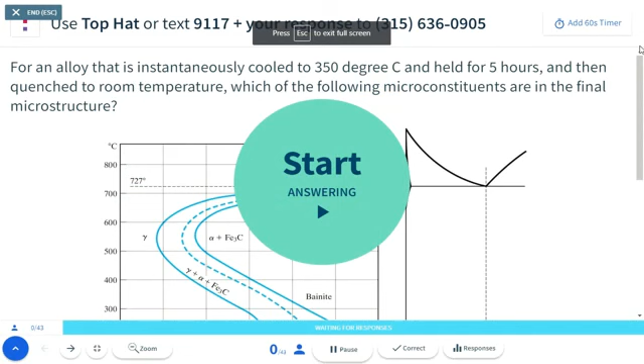Let's review our understanding of TTT diagrams. Here is something you've seen before. It says here an alloy, but when you look at the phase diagram and temperature, you know it's your iron-carbon phase diagram. So it's not just any alloy, it's iron-carbon, and it's instantaneously cooled. That's really important to know.

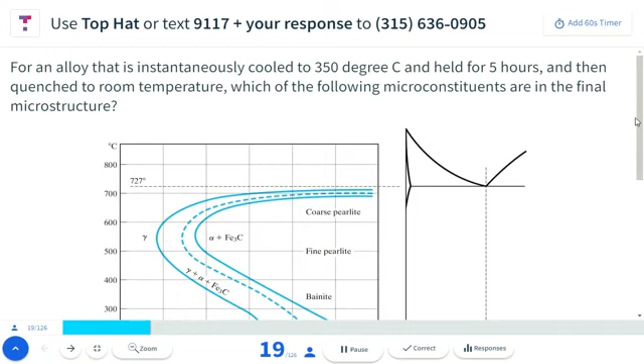We've discussed very briefly, and Professor Phillips during his guest lecture said there are situations where you are continuously cooling, but here it says instantaneously cooled. That means you drop the temperature as fast as you can to 350 C and hold for 5 hours, then quench it to room temperature. So what microconstituents would you expect in the final product?

Here it is, and it would help if you actually saw the time. Here's your transformation temperature, 727. You go down to 350 instantaneously, then hold for 5 hours. So clearly your x-axis is in seconds, not hours, please note that - it's typically reported in seconds or minutes. If you scrolled all the way down, you would have seen it is the phase diagram you all know and love from chapter 9.

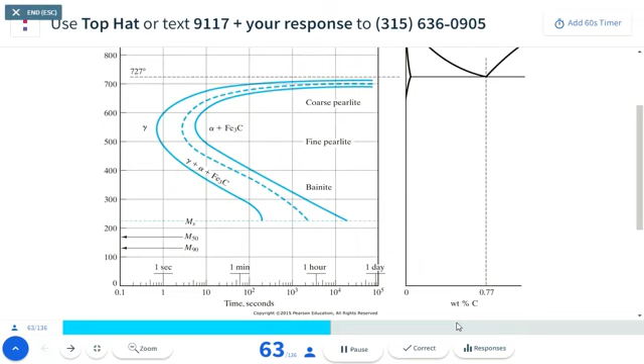So what microconstituent would you have? Would you have coarse pearlite, fine pearlite, bainite, martensite, or austenite?

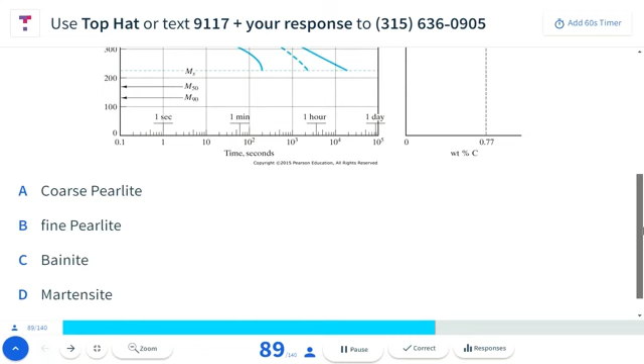Okay, it got transferred correctly. Unfortunately this figure and the options are not all going to fit, so I'm going to scroll back. Some of you would have seen this already in your recitation if you had it on Tuesday, so it should just be a review. You can rule out one answer based on the phase diagram, or if you came in early enough and saw when I exposed the answer.

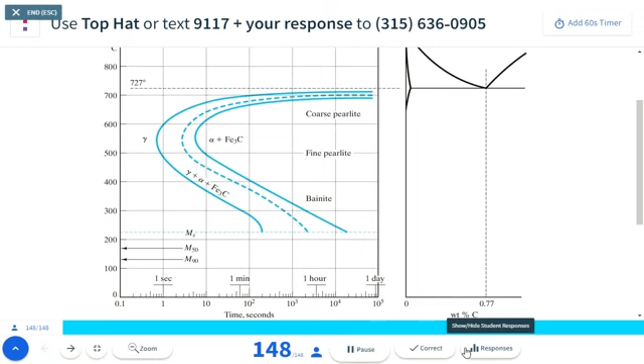Most people have submitted their answers, so I'll await the final five for another five seconds or so. There continues to be more and more of you. All right, we're at 100%, so I think this percentage is going to be high, but let's see.

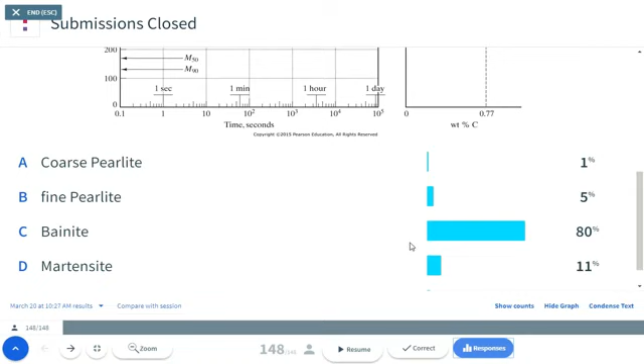An overwhelming majority of you said 80% bainite. That is exactly what you're thinking, which is if you have 0.77 weight percent carbon, this is your phase diagram, your composition does not change - this is the chemistry that you have. Then you drop the temperature very quickly to 350, which is about here.

Because it's instantaneous and isothermal, you can assume you've beat the nose - you haven't gone into this territory yet. If you go all the way down to 350 and wait 5 hours, that gets you to here-ish - 1, 2, 3, 4, 5 - so about here. That means you've gone through 1% transformation, 50% transformation, and now 100% transformation - you're well beyond 100% transformation to bainite. That's how you would be able to read it.

We went through very briefly some examples last time I lectured where you could end up in the middle like this. So if you're at the 50% mark, you've transformed your material from austenite to 50% bainite, and then if you drop the temperature you would get 50% martensite once you drop the temperature here. So just to review, if you have something like this.

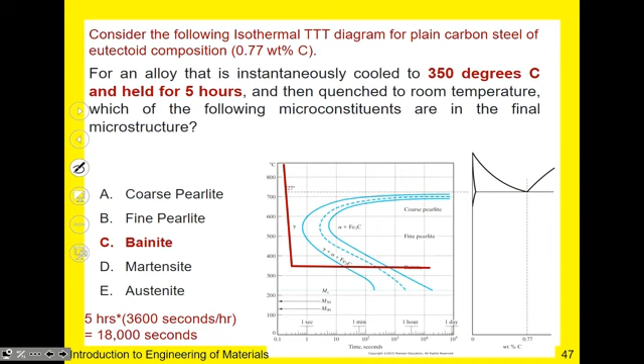Okay, let's move on, mainly because Professor Gaziasetti has talked a lot about strengthening, so I will move on from that, just to reemphasize some points that she made about precipitation.

So if you have a phase diagram like this, and you drop the temperature down slowly from this kappa phase down to this theta and kappa phase, whatever Greek letter you want to use, if you cool it down slowly enough, you allow the growth of the second phase precipitate to form. And that typically forms at the grain boundaries, as we've discussed, because kappa is a solid phase. You're not going from molten anymore if you're starting at this kappa phase. You're starting from a solid phase, and you're transforming from solid kappa now to solid kappa and theta.

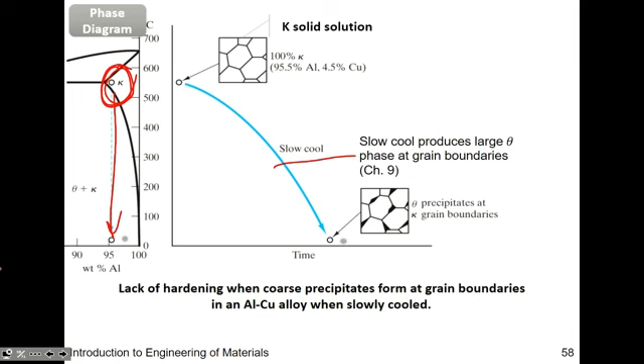Okay, so that's the scenario that Professor Gaziasetti was talking about. Now, there are a lot of heat treatments that you could do to increase ductility in your material or increase the strength a little bit.

So we talked about what happens when you quench very quickly austenite down to room temperature. If you can beat that nose, you're going to get martensite. That's great for you, and the strength will increase, but you lose a lot of ductility. Your material will be much more brittle than what you want in our iron-carbon phase system.

And so what people typically do is they'll drop it down to martensite, and then they gently heat it up again. It's called tempering. You heat it up again, and then you age it so that you can get these fine precipitates that are not actually at the grain boundary anymore. These fine dispersions will get you a little bit of your ductility back, and also some strength as well. So it's always a push and pull in terms of what strength you're optimizing for.

And so one of the questions that came from the front was, okay, I have this intrinsic strength in the material, what can I do with it? You can do a lot with it, and the next chapter, chapter 11, that we'll start today, is just what can you not do with it?

And so there are a lot of companies that have made their money in just knowing how to heat treat a material. A lot of those companies are in Ohio. There's a huge history in Pennsylvania, Michigan, and Indiana of forging and metalworking. So there's a lot of knowledge that already exists, but they're not always so open, because if you're a company and your bread and butter is that you know how to heat treat a material to get a desired property so that you can sell it to a customer, it is not in your best interest to share this secret. So then you don't go into academia, because I'm all about sharing information.

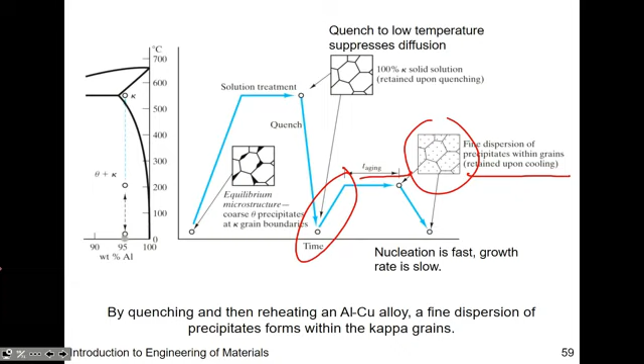There's like fancy animations that Shackelford provided. But anyway, you drop it, then you bring it back up.

So this was the summary slide that she brought up, and I really don't need to belabor the point that if you're wanting to increase the strength of a material, you're going to want to impede dislocation motion. Professor Gaziasetti re-emphasized some of the points we've already discussed in chapter 6, in terms of grain size refinement. So just make your grain smaller, so you have more grain boundaries. And grain boundaries stop dislocation movement, because it's really difficult for this dislocation to keep on climbing, because the energetics there is just too high for it to overcome. Solid solution strengthening, she's also talked about that, and we talked about it in chapter 6.

Strain hardening, right, working a material. And then precipitation strengthening.

So that really rounds out transformation, phase transformation and heat treatment. And all of these tricks that one can do in terms of recovery, recrystallization, grain growth, is just all to manipulate the microstructure so that you get your desired balance of strength versus ductility.

And as you've seen, the chemistries change quite a bit. When we're going from 0.7 weight percent carbon, 0.77, and then you go to 0.78, you're in the eutectoid land. So altering these chemistries, even subtly, have significant implications when it comes to the end result.

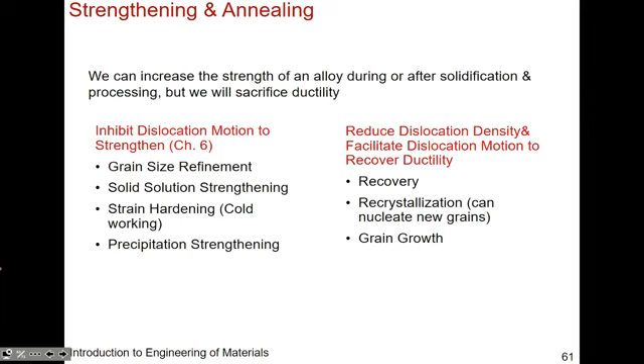So speaking of end results, we're going to skip right to chapter 11, where we're going to start talking about structural materials.

You can think about structural materials as both the type that come probably intuitively to mind, which is metals and metal-based alloys. You can also think about structural materials in terms of ceramics. And maybe that's not so intuitive because of some of the mechanical properties we've talked about, that ceramics can have higher strength, but they are brittle. And so there are certain applications where you don't want this in your life.

But I did pull up an example of a glass that Corning has made, and of course you're all the beneficiaries of the last 20 years of scientific research from Corning. Any guesses, or whoever came in early enough to see me Google this?

I know some of you were here. You saw me type it in. You can just shout it. Okay, wow, very sheepish today, I have to say.

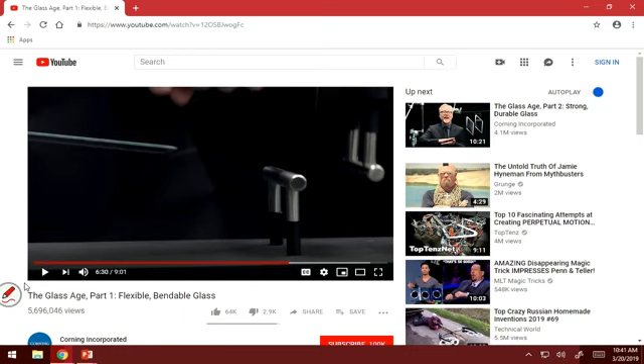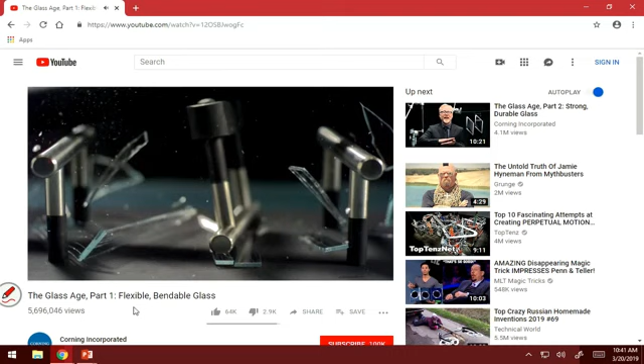Yeah, structural materials. So let's see, this is Mythbusters. We don't really need to, yes, the 3-point test. You've all seen this. So this is what you expect out of a glass if you're going to use it structurally, right? It's going to have this fantastic fracture beyond its fracture point, fracture toughness.

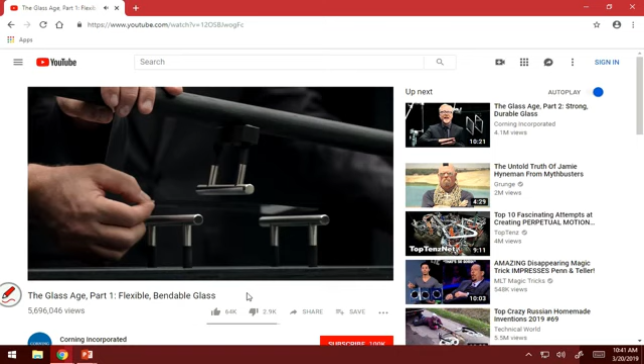And then he holds up this other glass. And notice that they're wearing goggles, safety first. So he's going to try to do the same experiment, but what do you see? You see it bend. I don't know what this is, so I'm going to maximize that. So you can see their discussion of this glass being flexible, and that's not at all intuitive.

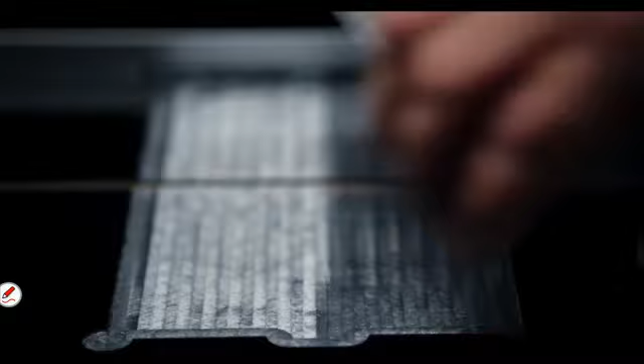And then what they can also do is laminate this glass onto stainless steel, and then do what with it? And then put it in 5 billion phones in the world and sell it to you. This is the result of why when you drop your phone, I will not have a demo on this because I like my phone, but when you drop your phone...

So he's inspecting glass on stainless steel, and they're obviously very intrigued about it, so they're going to do an impact test. They're going to investigate the hardness, although this is not how one typically does a hardness test, but this will suffice for TV. So stainless steel ball bearing, they're going to drop it.

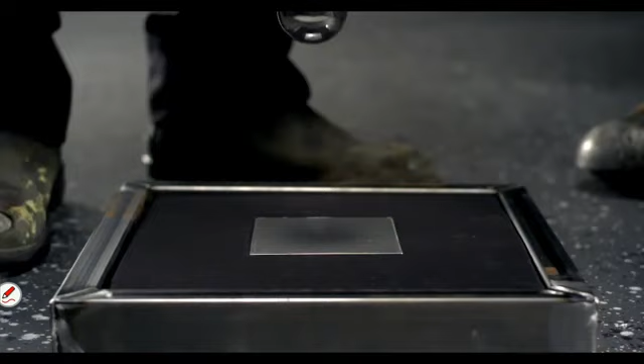Glass, of course, is not going to fracture, as you anticipate. It's going to make a dent. So you see a little bit of a dent here, but it doesn't fracture the same way. And what you'll learn from chapter 11 is exactly why it doesn't fracture. It's all because of a subtle chemistry change. So the glass that you see cheaply made in everyday life has what ion in it other than silicon and oxygen?

For the ceramists in the audience—Ethan is shaking his head, he's not a ceramist. You were going to say silicon. Yeah, glass is silicon dioxide basically, and depending on the crystal structure, it can be ordered or it can be amorphous. It's an alkali, start going down the list. It's sodium, also a good guess. Anytime anybody asks you to guess something, it's going to be silicon or sodium, given the abundance of these elements in the earth.

So that's one way that glass and ceramic materials have absolutely transformed the way we live. Without this, your phones—well, maybe it would be better for Apple, because then your phones would just be cracking left and right, and then they'd sell more phones. So it's hard to say what is economically better for them.

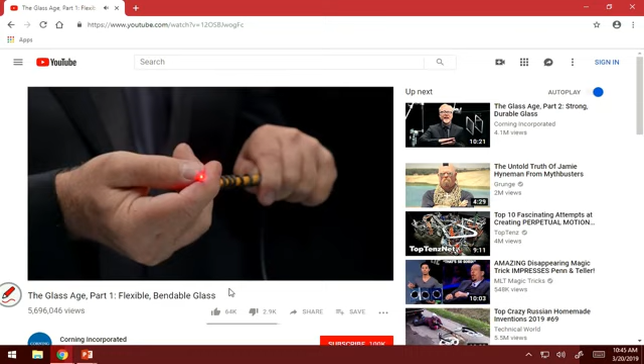Yeah, so he's twisting this, there's light coming out. This is all glass, by the way—well, okay, not all glass. The material outside is not glass, it's a plastic. So he's bending glass, which is not something you would expect. What is that? What is he bending?

All the ECE folks in the audience—fiberglass. Yeah, glass has basically transformed... the only reason Apple even has something to operate on, that everybody taps into the fiber optic network, the fact that you can talk to somebody anywhere in the world, is because of all these fiber optic cables. It would absolutely not be possible if it weren't for the fact that Corning, in the middle of upstate New York, decided they were going to be able to do this. So not only do they do bakeware, which is great—you can bake your brownies, you can bake your cakes—but now you can talk to everybody else in the world because they enabled the internet, as we speak, through glass engineering.

So it seems like, haven't we figured out how to melt down sand to make silicon dioxide glass? No, apparently not, and this is obviously quite recent. So there's a lot of engineering in glass. And of course you have Owens Corning right around the corner in Granville—about 45 minutes from here, if you're not familiar, although I surmise most of you are familiar.

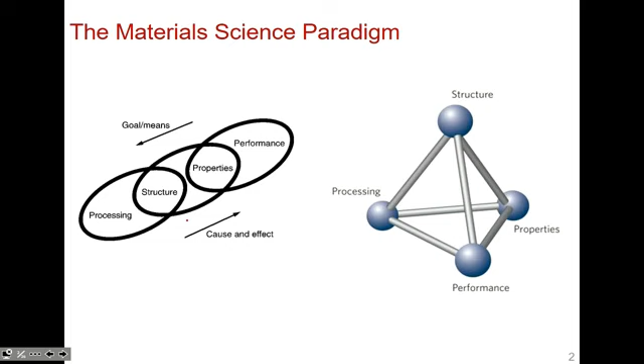So that's what we'll talk about today. This is the classic point, as I said in the first and second lecture of this class: understanding structure is one thing, but then processing it, knowing the heat treatment, knowing the phase diagram—that's the rest of engineering, because it all ties back to the properties and the performance of your material. We're on this loop: we want some endpoint application, we want to know how to process it, and then we need to understand what happens when we process something—what are the structure, property, performance relations of this material. That's a huge buzzword these days: structure, property, performance of a material.

Your chapter 11 goes through excruciating detail into how we talk about materials and how we classify materials. I think it's come up before where you've seen in your homework and exams people refer to all these materials and alloys as, okay, we're dealing with 1040 steel, so that's iron with 0.4 weight percent carbon. All this jargon, all this nomenclature comes out of the taxonomy—this systematic classification of materials, the same way we can classify animals on Earth with their families and kingdoms. We have the same way of talking about materials systematically.

Certainly we've already talked about the different classes of materials—the ceramics, the hybrids, the metal alloys, the polymers—and we'll talk much more about polymers come chapter 12. We have quite a number of guest lecturers who think a lot about polymers and how to make them mimic certain bio functions. It is extremely cool, I think, even though I don't do bio research.

So back to my point about classification, lots to do. When you see something like aluminum 6061, if you work in the aluminum alloy industry, I think you know off the bat what 6061 means. If you're like me and you're not a metallurgist, then you just go look it up. And that's fine, but there's a rhyme and reason for all of these numbers.

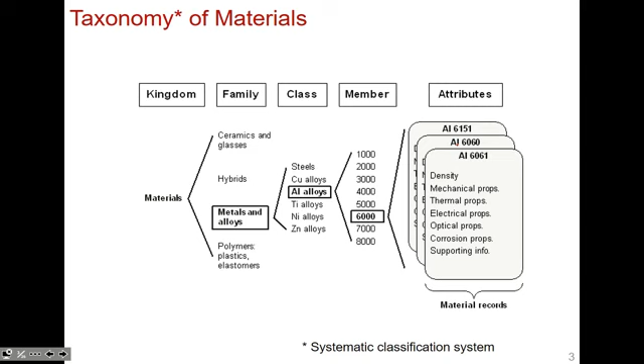Your table 11.1 goes through all of these great details. You have your carbon steels, 10XX, so that's, you could be 1040, it could be 1070. If you heat treat it and have resulfurization, then it's 11XX, and the list goes on and on. So these tables are really just good for reference, not for memorization, unless you happen to work in a lab that deals with one material, then I think you start to know that class of material, that naming system very well. But I would say the takeaway for chapter 11 is that it's a very good reference.

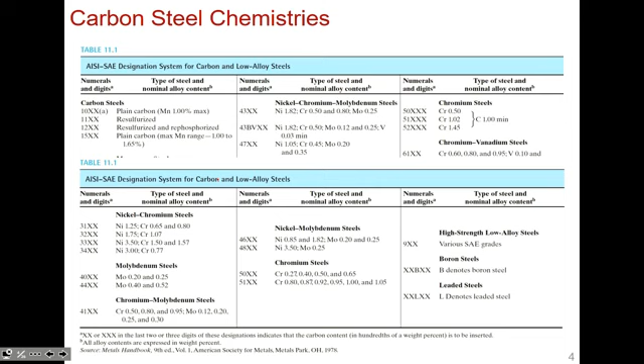Same thing for stainless steels. You could see that for these knives that are attached to some magnetic component on the wall, they have to have some magnetic iron in them. Otherwise they wouldn't hold up the same way. And if you remember your demo where Paul, your TA, had the iron piano wire, resistively heated, and at a certain point the magnet dropped, right? It passed the Curie temperature. It passed the 770 degrees Celsius point.

And then beyond that, beyond 910, it would phase transform from BCC to FCC. And so if your stainless steel knife is magnetic like this, then okay, there's got to be some BCC iron in there, if you know it's a steel. So all these things, you can sort of tell.

Then, of course, you can go down the line and know, okay, well, if I want some corrosion resistance, I need to add in some chromium. That changes the numbering scheme from 304 austenitic stainless steel to 316. That's a very good grade. If you ever buy stainless steel, buy the 316. It's very resistant to corrosion and has some chromium in it. Because of the chromium, it can also form a chromia, Cr2O3 passivating layer, the same way alumina forms a passivating layer, the same way SiO2 forms a passivating layer on silicon.

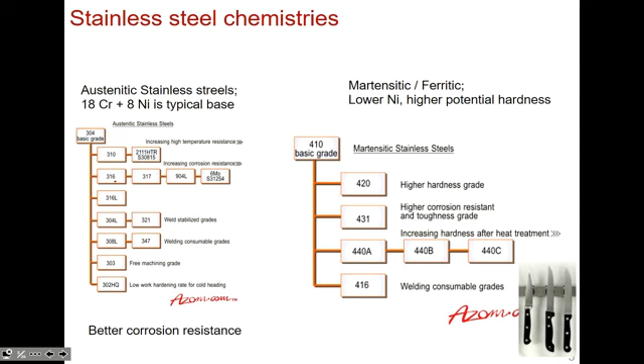If you're ECE, you're very familiar with this. If you're more corrosion, MSE, welding, others, then you would be more familiar with the other oxides that form. So that's fabulous and all. And then you could think about, okay, well, we've talked a lot about low carbon content. What happens when you have a lot of carbon content?

And I believe someone had asked about graphite or just a lot of 100%. What happens when you go beyond 6.7 weight percent carbon? You get all this graphite flakes that come out. Not the worst thing in the world, because you do restore some mechanical properties, but then you have graphite everywhere, so you might pay a price in terms of strength there.

Okay, something I should also mention. Even when you have a low carbon content, so what we were talking about before was 0.77, here it's 0.68 weight percent. But whatever the eutectoid composition is, when you drop that temperature below the eutectoid temperature and then you wait long enough, it's going to form pearlite. We talked about the microstructure, we talked about the phase diagram, we can compute all the phase weight fractions that we want.

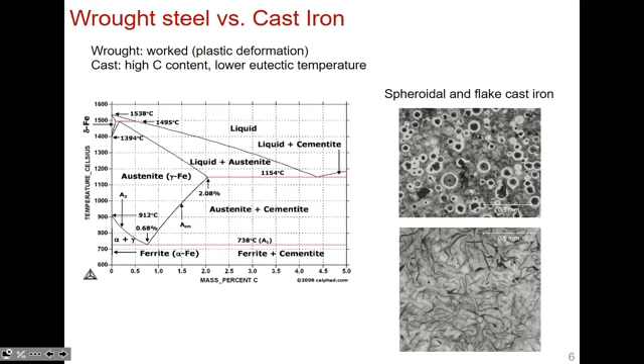Something I also want to mention is that it's really energetically consuming in terms of getting ore out of the ground and then getting it to whatever metal that you need to get it to. So if you're digging up iron oxide out of the ground or calcium carbonate, all of that, there's a lot of CO2 that gets formed. And I alluded to this earlier in lecture 2 of this course, where I said, you know, a lot of the ways that we've been mining and purifying metals from ore is just basically killing this earth.

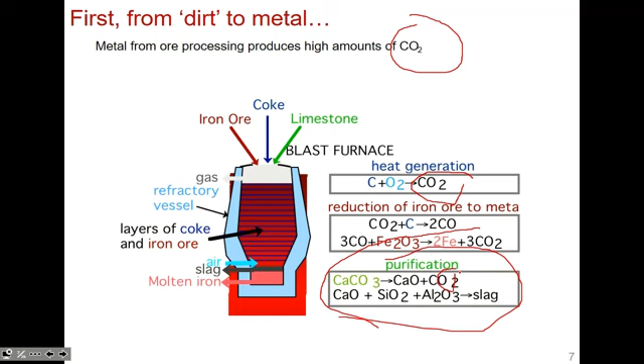It is a total detriment to climate change, because so much CO2 gets generated, and once you dig the ore out of the ground and purify it, you generate even more CO2. There's a lot we can do here. We know a lot about manipulating and processing materials, but the step before that, there's a huge need for environmental science, to maybe avoid reducing the oxide in the ground into a metallic ingot that you could use. Okay, so that's my two cents on climate change.

So wrought metal products, that means they're worked, right? When you work them, there are a lot of ways to make thin sheets. Certainly roll milling is quite important. Whenever you get aluminum slabs, it's all because of this. They have huge ingots, and then they roll them out into sheets. So your aluminum sheets came from somewhere, sort of like your baby carrot came from a larger carrot. Yeah, there's a lot of waste, okay?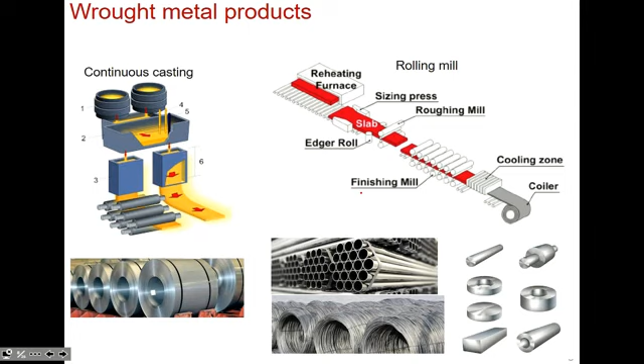So there's a lot of detail on forming, casting, joining—how do you manipulate all of these structural materials to get the shape that you want? There's a huge industry in this state, and there are experts who can tell you about just one system, but you should know there's just a lot. So there's forging, rolling, you can draw and extrude to get all of these shapes. And of course, we're talking about metal.

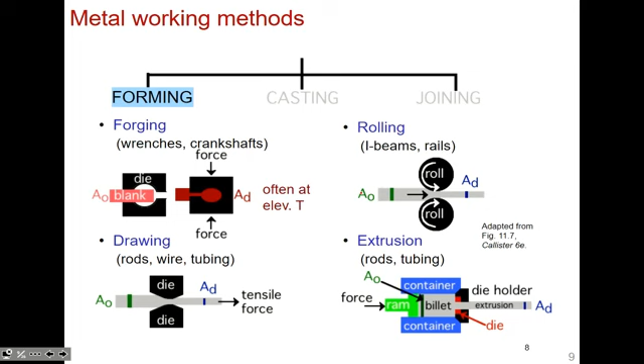So when we talk about ceramics, you can't really apply the same methodology. You can't roll ceramics the same way you roll metals. So, right, hot working, cold working—there are obviously pros and cons for either.

For hot working, you can manipulate the microstructure and recrystallize. You can use less force to form the material, but of course you have to get the system up to temperature and then work it. So clearly you want to cold work if you want to avoid the huge energy costs you have to pay upfront. So that's something to think about.

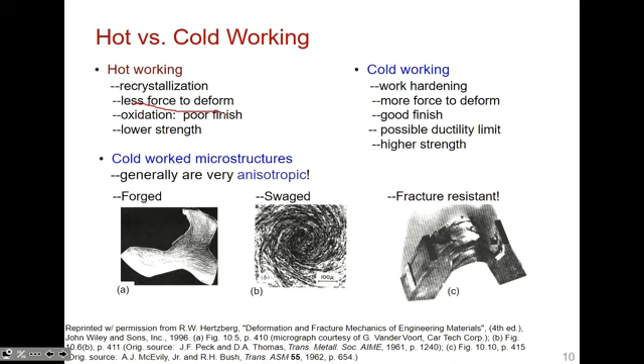Certainly, that was forming. Certainly you can cast shapes as well. If you have a really complex system like an automotive engine block, you're certainly not going to roll it out and get this morphology. You're going to have to cast. So casting is exactly what you think it is—you take it into the molten state and dump it into some mold.

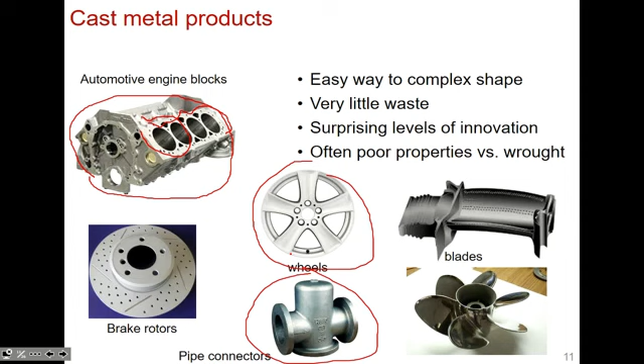After that, to get all of these finer details, like rivets and things like that, there are processing procedures that go on afterward. But if you wanted something quite complex and big like this, casting is the way to go. And of course, you could see all of these shapes have different dimensions. So casting is one way to go.

Aluminum alloys—all I have to say is that there's another naming system. I don't really expect you to memorize any of this, by the way. Chapter 11, as I said, is just a really good reference. There's a lot packed in there, but your takeaway from chapter 11 is just understanding the different ways of processing structural materials, let's say metals versus glass.

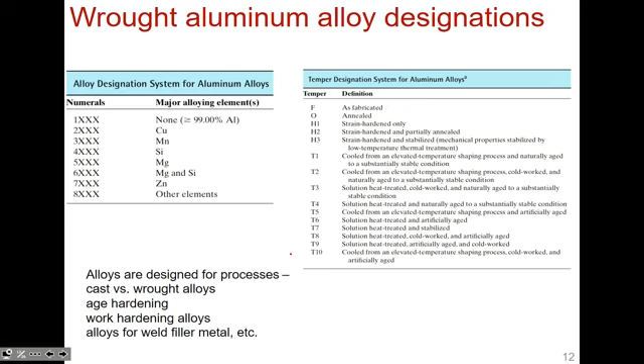When you cold work a material, certainly the dimensions change. So if you're rolling or pulling, your area gets smaller. The percent cold work is basically that difference, but in percentage form. If you start out with some area, that's your A naught, you'll have some new area that's a little bit smaller because you worked it, and then you divide that by your original area. Percent cold work is just 100% of that, and your area, of course, is just pi r squared.

So you have a tube, let's say, of material, your area is just pi r squared, where r is the radius of your starting material. And then if you cold work it, or extrude it to make it smaller, the area is going to be smaller. So your A sub f is going to be smaller.

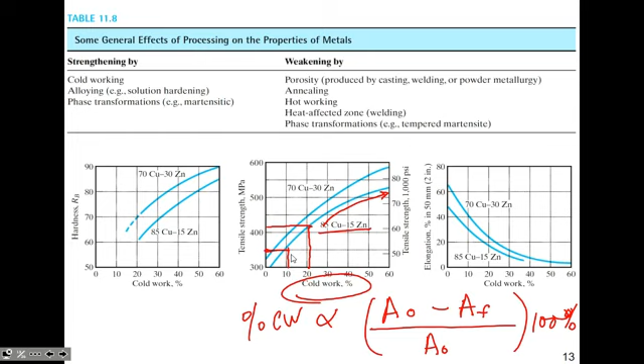And then, of course, the payoff does start to plateau after a while. You may or may not see this in your homework for homework 6, by the way. So that's how you read these types of plots: how much did I cold work, what is the dimensional change, and how does that affect my strength, ductility, percent elongation, and hardness. Hardness, as you recall, is the resistance to indentation.

Ceramics, so many things. Yes, so I'm talking about, like, if you have a typical dimension like this, your area is based on that.

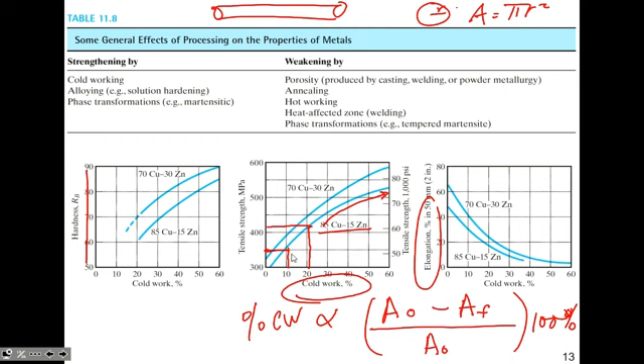So many things to talk about when it comes to glasses, clays, and all that. Beyond pottery, which, by the way, is a fabulous hobby if you ever need one, lots to do with that. Certainly we've come a long way from just making pots to hold grains and presumably some fermented alcohol back then, because that's how you store beverages without killing yourself with bacteria infection. We've come a long way in understanding ceramics and glasses.

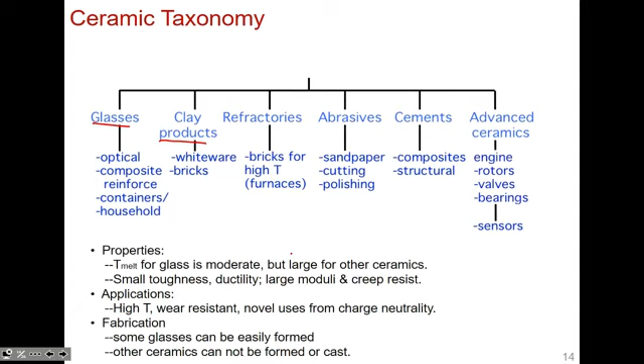So when we're talking about the different types of ceramics, we can call them glasses, clay, refractories, abrasives, cements, advanced ceramics, all of that. So let's break that down as to what are the challenges in terms of dealing with ceramics.

As we mentioned, they have high strength, but they're brittle. Their high melting temperature also is not great when it comes to processing the material, because materials that can withstand high temperatures before they melt means that if you want to do something with them, you have to get to that high temperature. The ceramics we're talking about, the zirconias and the carbides, have melting temperatures at 1800 degrees Celsius, even 2000 to 2200 for some of the carbides.

That's extremely challenging to build a furnace out of, to even do your processing. So, one, what material is going to withstand that temperature, and then how do you get that material into furnace form so you can use it to manipulate another ceramic? These are really challenging. As you should know, glass melts and starts to lose structural integrity at about 1200 degrees Celsius, so anything higher, you can't even use glass as a crucible. You have to move over to zirconia and other crucibles to even hold your material.

So there are a lot of challenges. If you're looking for a box furnace and you just need to heat up to some mild temperature below the glass melting temperature, you're looking at maybe $1,000. As soon as you go over that threshold and ask a vendor for a high temperature furnace, we're talking tens of thousands, very expensive. And I'm talking about a furnace that's this big, that holds one little thing, lab scale. So if you're a large company dealing with ceramics, this is the challenge you're faced with.

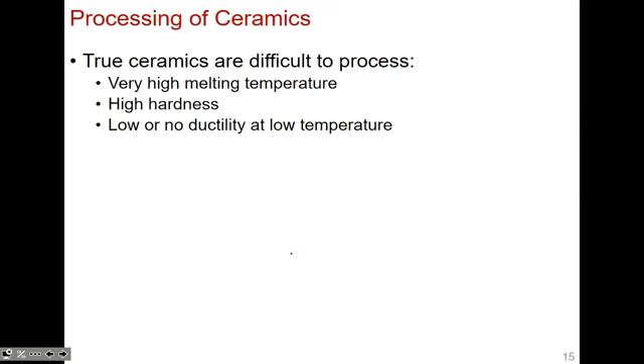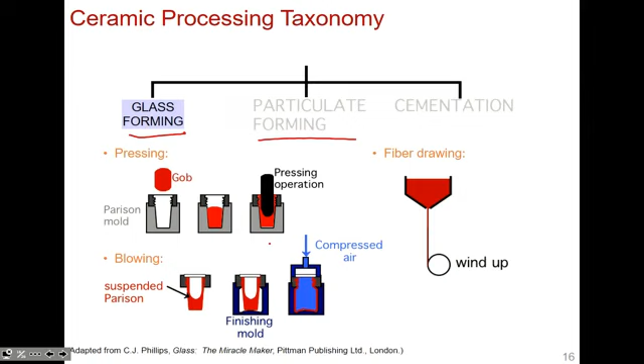But obviously, with fiber optics and all the glass science in the world, clearly we've come a long way in terms of understanding how to form glass. We'll also talk about particulate forming and cementation. So here we come back to our initial discussion of what is in common, everyday glass: soda glass. That is the cheap glass that you can buy.

They have sodium ions in there. And so you could think about the viscosity of silica. If you have regular silica, just SiO2, it could form in a structure like this, but you can bring down the viscosity by doping in sodium ions, and that lets you work with the material this way.

And so you could see the viscosity here at annealing temperature. You can bring it down to, say, 600, as opposed to what I was telling you about before, which is like 1,300 degrees Celsius.

So it's actually quite advantageous by just doping in sodium ions. The Gorilla Glass you saw in the YouTube video at the beginning of today's lecture is completely different, because if you have just soda glass with sodium ions in this SiO2 structure, it fractures. So what Corning did was take out the sodium ions and exchange them with potassium ions. Potassium is just larger, lower in the periodic table, and it absolutely changed the mechanical properties of glass.

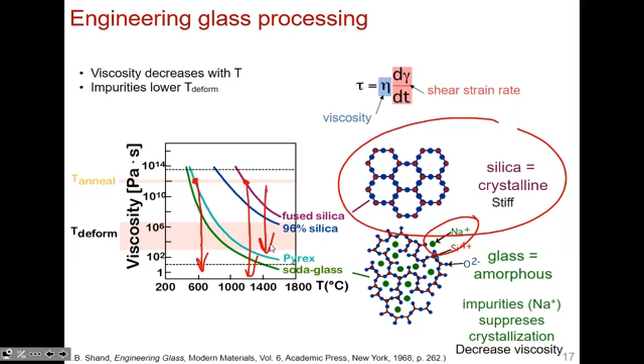The last thing I want to talk about in terms of strengthening glass is the Prince Rupert's drop, where you melt glass into little tear-shaped droplets. You drop them down, and because there's compressive stress outside and tension on the inside, it's quite strong, but it has a lot of energy stored in it. If you break the little tail, the thing completely shatters, but if you touch the drop itself, not the tail, it's completely fine and quite strong. That's glass engineering in a nutshell.

What you typically do is have hot glass, and as you're cooling it, you can spritz the surface to make it cooler. Or with Prince Rupert's drop, you can just drop it into a bucket of water, and the same thing happens. You get compression at the edges and tension on the inside, which creates stronger glass, but there's a certain failure point where when you touch it, it completely shatters.

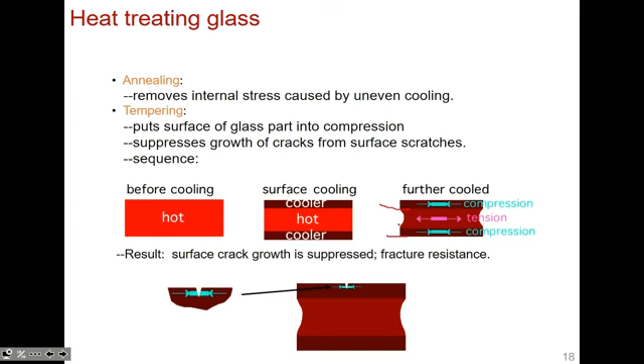Firing, I've already talked about that.

In terms of processing glass, something we've talked about at the beginning of the course is sintering. We looked at single crystalline ceramics, where they're not transparent when polycrystalline, but when you make it single crystal and sinter it, basically just press it, you can get optical transparency. So even materials that normally don't possess the optical properties you want, if you want transparent ceramics, you can press and sinter the material, and it will remove all the pores and make the material transparent.

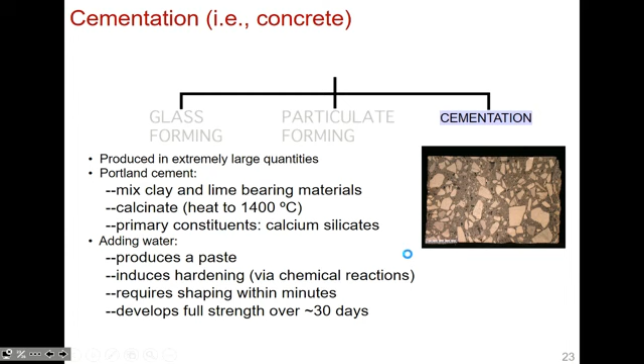Hi, quick question. We've been focusing a lot on metals and stuff this semester, are we going to hit more on ceramics and polymers later on, or is it just mostly metals? Polymers, yeah, so chapter 12 is polymers and composites.